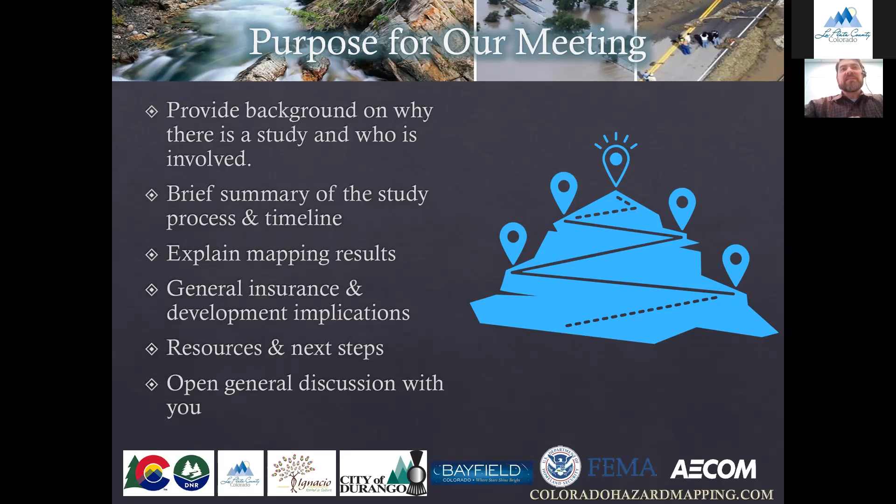If you have specific questions relating to your property, your structure, your home, your business, it's probably good to reach out directly to your floodplain administrator or the person that's acting in that role, because some of the questions get very specific and they're best answered on a one-on-one basis. So I'll just leave that as a caveat.

The National Flood Insurance Program is the program that administers flooding nationally. And flooding is the most costly and devastating occurrence nationally that we see. And so our government and many people associated with that have decided that in order to help recover, protect, mitigate from the risk that are associated with flooding, that there is a national program whereby these flood hazards can be depicted, and that community members can obtain flood insurance.

As part of the program, it is important to update flood hazard studies periodically, because it is most important that we strive to protect health, life, and safety. And so that is one of the reasons why this flood study was undertaken. The National Flood Insurance Program is something that communities participate in.

In order to participate in that national program, there are minimal level of requirements such as building requirements, insurance requirements, regulations that they must be kept, and other regulations that they adopt. Communities are required to inform the public of this risk and to also keep land use code requirements up to date as they change. And those are part of the things that communities have to participate in the National Flood Insurance Program. But the program is something that has other inputs too.

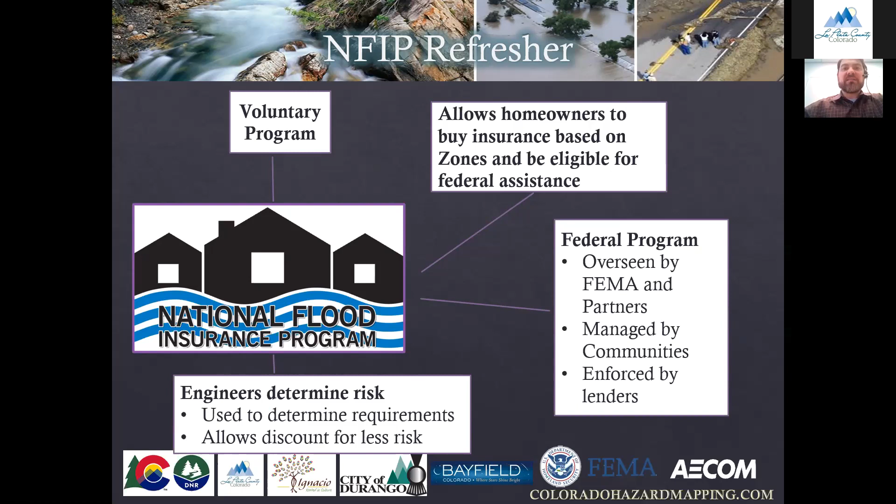There's a general partnership that goes into the flood study and making sure that all parties are at the table, so to speak. As I mentioned before, communities are the ones that administer the National Flood Insurance Program. They can communicate the risk to not only their constituents, but if they know that there are added risks that are not currently up to date, they can communicate that to the state, to FEMA, and see that those areas are updated. Communities are involved again in enforcement of regulations and public communication. And this public meeting that's being held is an integral aspect of the typical type of communication that happens around these studies.

The state, the Colorado Water Conservation Board, is a major partner. They respond to communities to incorporate any changes or risks that need to be updated. They can initiate risk updates if there are needs that they're aware of. And they play a vital role as an assistant to not only FEMA and communities in training and communication and any needs. FEMA, again, is the federal partner that provides a large amount of the funding and knowledge and resources to update these flood studies. And not only that, but also mitigation grants and a whole suite of other things, and some we'll get into.

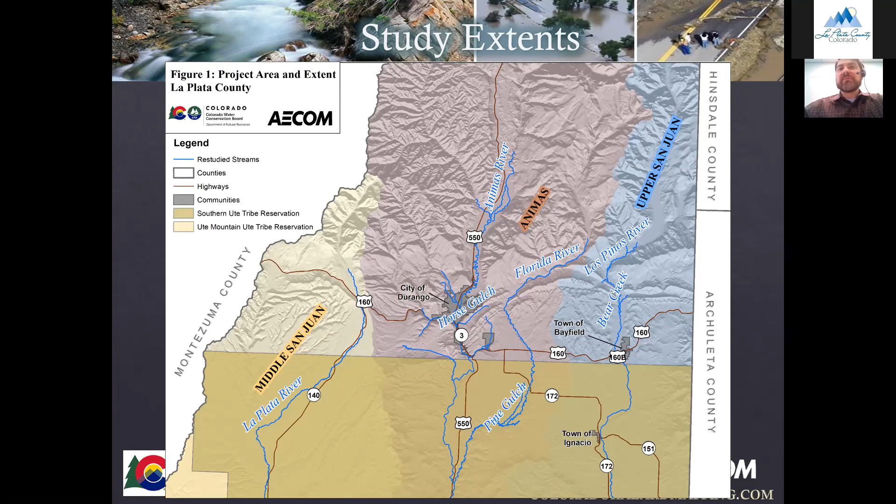We get questions on what goes into these studies. First and foremost, we need terrain data, which is a description of the land surface, the high points, the low points, and it's very detailed and very extensive. LIDAR, or very accurate laser mapping, is used to obtain terrain data on a large scale, and some of that was used in these studies.

Survey crews then are sent out into the field to capture more information, things that do not get picked up from the aerial topography, such things as bridges, the bridge openings, the sizes, culverts, also below water channel, or bathymetry, sometimes that's what that's called. Anything that's below water, surveyors go and pick that up, and it helps to describe the complete channel and floodplains for these streams.

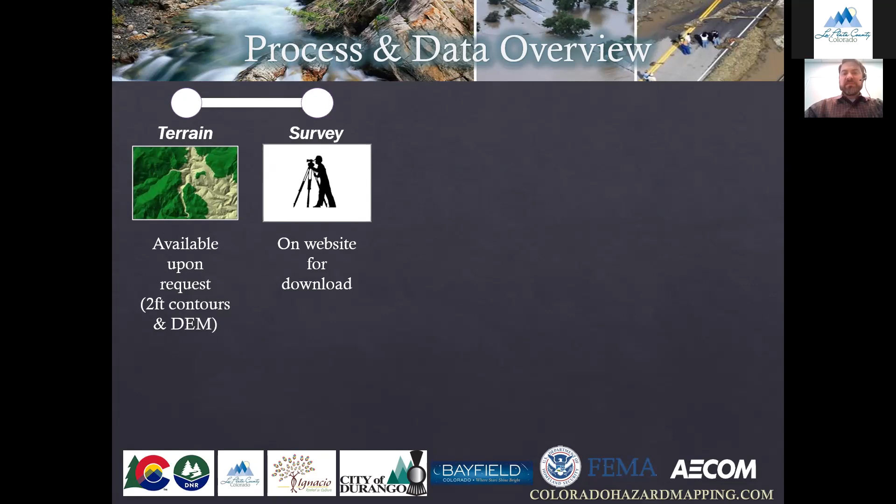Then statistical analysis on the amount of rainfall or peak stream runoff, which is called hydrology, is computed, and it determines the peak flow for rare storm events, for a couple of different events, and those are input and used. Again, all of this data, because it's federally funded and state funded, is available for download and inspection.

Then that information is taken and put into what's termed as hydraulic models. These models compute water surface elevation, depths, velocities, and determine where floods can go and how high they can get. Those are then mapped as floodplains for ease of use, so that anyone can quickly look and pan around and see on a map where those floodplains are depicted.

These data together generated some draft maps, or preliminary maps. That term's an important term. They are now preliminary, meaning they've been reviewed by multiple partners, including FEMA and their partners, but they're now in a preliminary state for the public to look at and see what the updates are. These have been provided to communities, all this data, including these maps. But going forward, there's a couple of steps that have to happen before this draft data becomes effective or final.

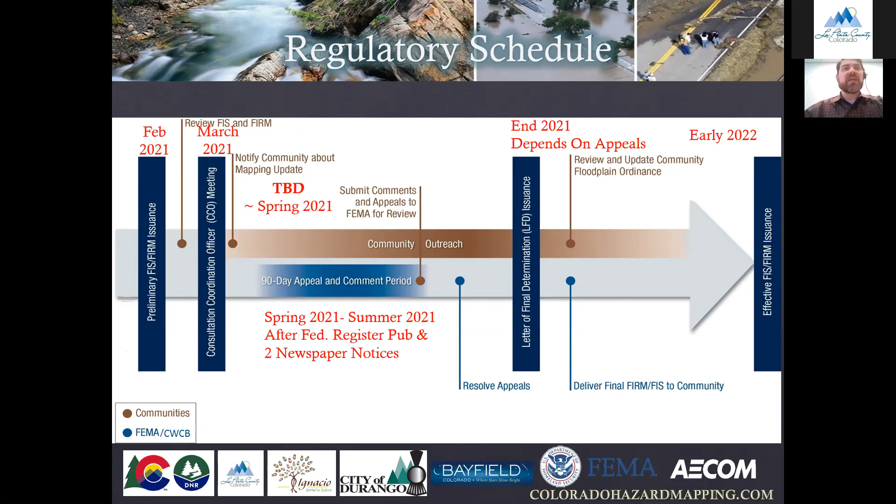Now, what are some of the results? We often get a question, what do these results mean? There's a polygon and a couple of different shadings on the maps. Is this where it will flood? And only where it will flood? Well, that's a good question.

They take into account the best available data at the time that they were given, at the time the topography was flown and at the time the survey was flown, including rainfall data, stream data, hydraulic data at the time that we had them. There are certain things that are not mapped because they are not a part of this standard flood hazard. Say, if a dam were to burst and break, that would be above and beyond the analysis that was performed here.

In major storm events, there are uncertainties with debris or clogging, or sometimes there are logs from the mountainous streams, or if there have been large burn scars or things like that, large storms can carry those down and they can clog up bridges and culverts and create uncertainty as to where the floodplains can go. Those are not accounted for because the amount of uncertainty is too great, but know that there is flood hazard and additional hazard that may not be depicted in these.

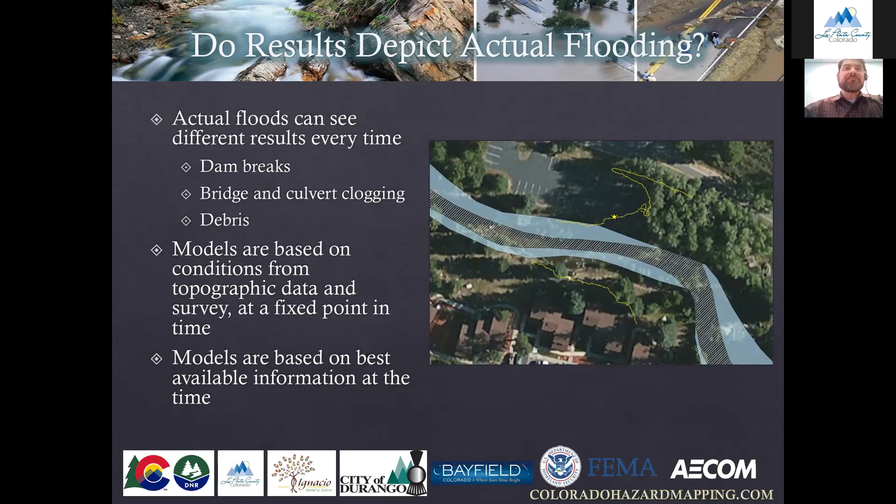What you'll typically see is a map with some different shading. Sometimes they have aerial photography underneath, sometimes they don't. Sometimes you can view them on online viewers where you can pan around and you can change what's shown beneath. But some of the things that you'll see, I'll highlight here.

The teal areas are Zone A, or sometimes Zone AE or AO or AH. That is the high hazard area, or the 1% annual chance flood. That's an important distinction because those areas are where flood insurance is required. In times past, you may have heard of the term 100-year flood.

And that is truly a misnomer, because sometimes people got it in their mind that, oh, we had the 100-year flood, I heard it in the news, so we're good for the next 99. Mother Nature doesn't work that way. She can flood when and where she wants. The term we use is a 1% annual chance, meaning there is a 1% chance that this storm could happen in any given year. It is a small percent, but it is a substantial percent.

The beige or orangish area is the 0.2% chance, even more rare. In the past, this was the flood that was called the 500-year flood. It is the area of moderate hazard risk. And outside of that, in the white or sometimes unshaded areas, that is the low hazard risk.

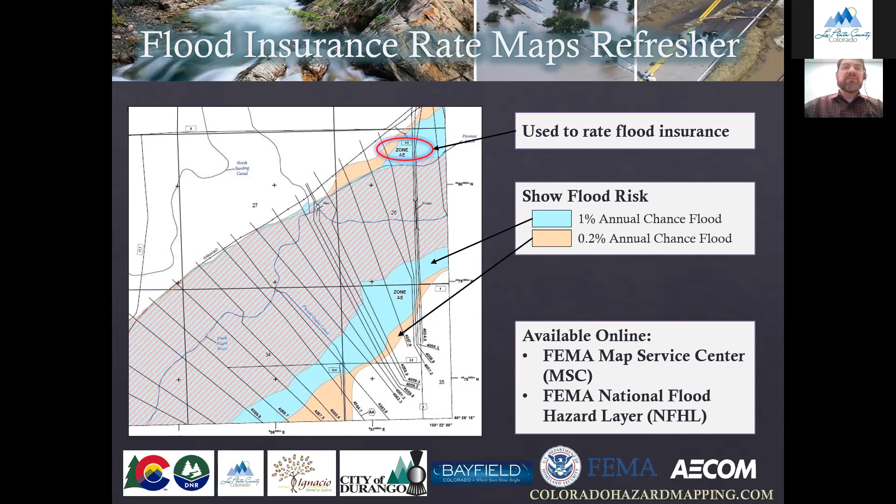These maps can be in PDF form, they can be in online form, they're available at many different locations. The current effective ones are available at FEMA, the Map Service Center, or their National Flood Hazard Layer. The preliminary ones are available at the community and also at a website, coloradohazardmapping.com, and I'll show that in a later slide.

In addition to the floodplains, in the center of the floodplain, there will sometimes be depicted what's called the floodway. The floodway is an area that usually depicts higher hazard, higher depth of flooding, higher velocities, but it's a special area. You've got the fringes on the outside, and on the inside is the floodway.

The floodway, as I like to describe it, is an area of regulatory importance. If in Colorado a developer was to build up and encroach on the floodplain on both sides, at what point could they encroach on both sides all along that river corridor to not increase the water surface elevation more than half a foot anywhere? That's the standard in Colorado. Some other states have higher or lower standards, but in Colorado, it's a half a foot. And then that is depicted as where the floodway is.

If any future development were to occur in or near the floodway, there is a higher regulatory standard to prove that there are no adverse impacts to your neighbor, either upstream or downstream. If you were to build or develop in that area, you would have to show that there would be no adverse impacts. So you'll sometimes hear it called don't impact your neighbor.

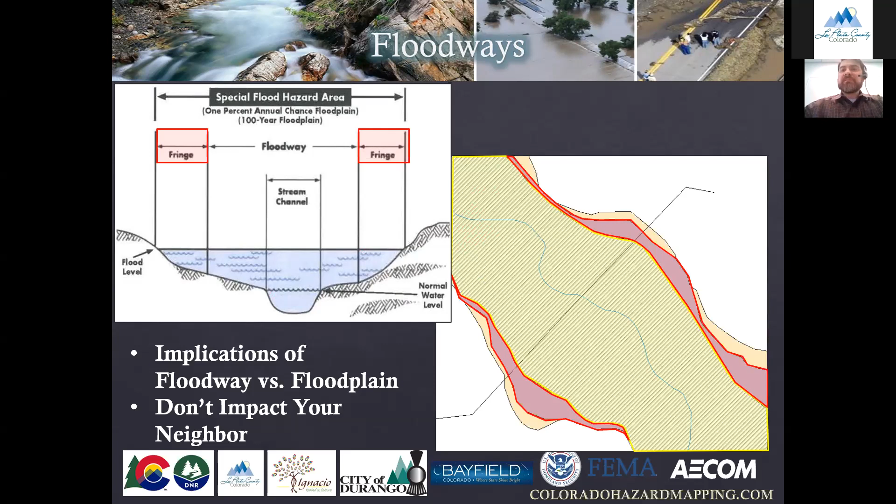So that's what a floodway is. Now, when we look at the updates to the current preliminary study versus what is effective right now, we took a national data set of structures, of buildings. It's not the most accurate, but it has quite a bit in there. Some counties or communities have more up-to-date building structures in their spatial sets, their GIS databases, their online databases.

But we did a quick count of areas that were currently in the effective special flood hazard area, or that 1% annual chance flooding, and those that are now newly in the preliminary, and those that would be removed from the preliminary and that are currently added. So you can see in the unincorporated areas, we have a total of about 940 that were in the effective special flood hazard area. Only 411 in the preliminary, which means about 705 were removed and about 177 were added.

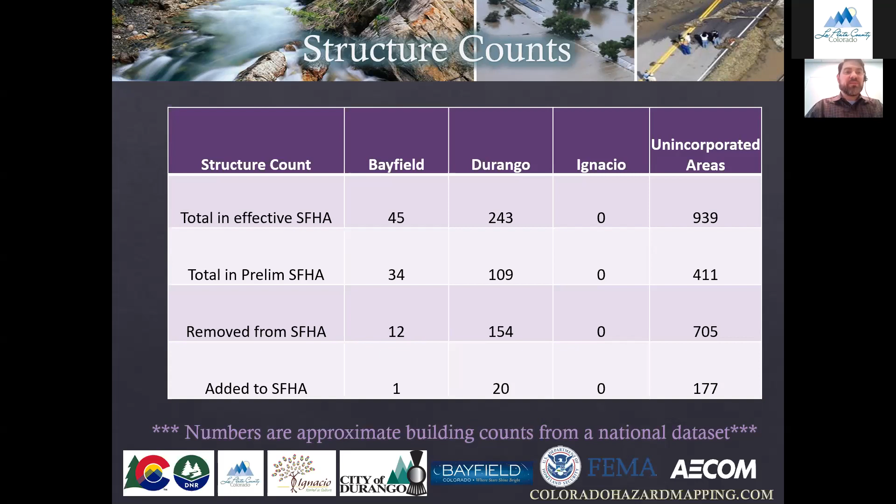And this is usually a result of just the newer hydrology and newer hydraulics, newer topography. There are lots of changes from some of these old studies. So there are people that may see their homes removed. There are people who may see homes or property or structures added to it. So these results, as they get depicted, they are a line on a map. And that's just for convenience sake to show where these floodplains are to the best of our data.

But Mother Nature does not operate as a line on a map. Areas can flood outside of a map. There can be debris areas. There can be a whole suite of uncertainty in the way that floods operate. So just because there is a line and a property is outside of that line, that doesn't mean that there is no risk. There might be less or reduced risk, low levels or moderate levels, and not the high levels, but know that a line on a map is just that, it's for convenience.

We did use our best data at the time, and it did go through multiple rounds of reviews and comments through contractors, so it has incorporated the best use of any current and up-to-date engineering data and judgment and methodology. But there is a process to allow for changes if there is any new information, new construction, any new type of information that would change the results. There is a process to do that.

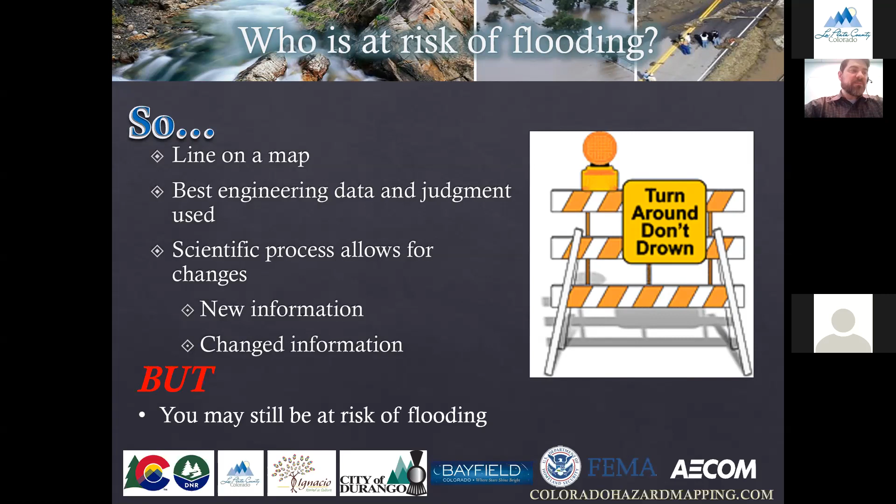But just know that we're always at some risk. It may be very small, it may be moderate, it may be minute, but there always is some risk of flooding. And that's important because flooding is not covered by our typical homeowners insurance.

And we'll turn the time over to FEMA. I don't know if it's you, Aaron, or Diana, who is going to take the next 3 slides. So I'm going to take the slides. This is Diana. Okay.

So I'm going to talk about 2 options that we have today. And the window of opportunity is closing very fast on us. Casey talked about the flood insurance rate maps. They've been called flood insurance rate maps in the 50 some odd years since the program was initiated, but that's changing. Right now, you have until September 1st to take advantage of our, as Casey mentioned, discounted premiums. But after October 1st, we are doing a new risk rating methodology.

In the past, we've only taken into consideration 2 types of flooding, riverine and coastal. But we know across this country that we have different types of flooding. We have heavy rains, we have tsunami risk, we have other types of causes of flooding. A Mack truck hits a fire hydrant, or we have these cloud bursts that come down and drop a whole bunch of water, regardless of the flood zone. Where that water lands and rises is going to cause flooding to some people.

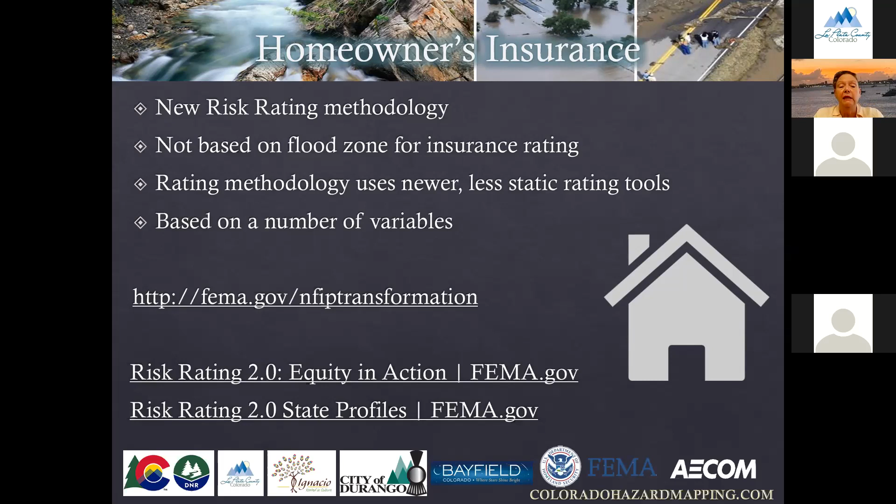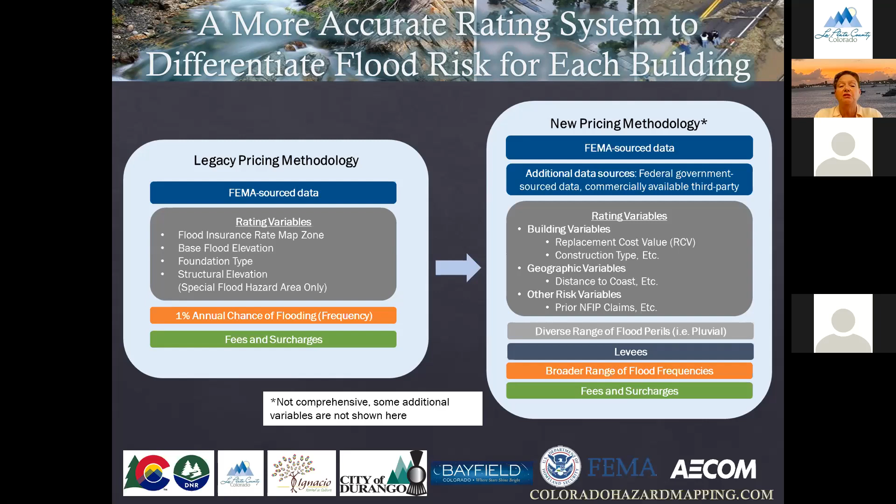So these are some of the variables that we're going to be using. On the left-hand side as we look at the screen, those are what we've used in the past: the map zone, the base flood elevation, what was the difference between the lowest floor and that base flood elevation, the foundation type. And as you see on the right-hand side, the rating variables, then we've got the different types of flood perils, the pluvial, which is heavy rain, the fluvial, which is riverine, the coastal areas. How are levees affected? What are the flood frequencies? We have multiple 100-year floods in areas every year. And then we add our fees and our surcharges on top of that. Next slide.

So with map changes coming in, we have to look at, okay, what's the rating methodology best right now? The risk is there today. The maps have identified that risk, and you need to look at that risk and how it affects the property owners that are within those special flood hazard areas and outside of those special flood hazard areas.

As I said, prior to policies being written September 1st, because we have a 30-day waiting period, people can take advantage right now and get a preferred risk policy to cover that risk when they're outside of that high risk area, or if they're built to a higher standard, and that will carry into affecting rates under our risk rating methodology that's coming later this year. At no time will we increase premiums annually more than 18% on an individual structure.

For certain types of buildings, Congress has said, well, we want you to increase rates 25%. So those are severe repetitive loss, non-primary residences, commercial residences, structures that have been flooded and are substantially damaged or want to be substantially improved. Those carry actually a higher risk for flooding than anybody else.

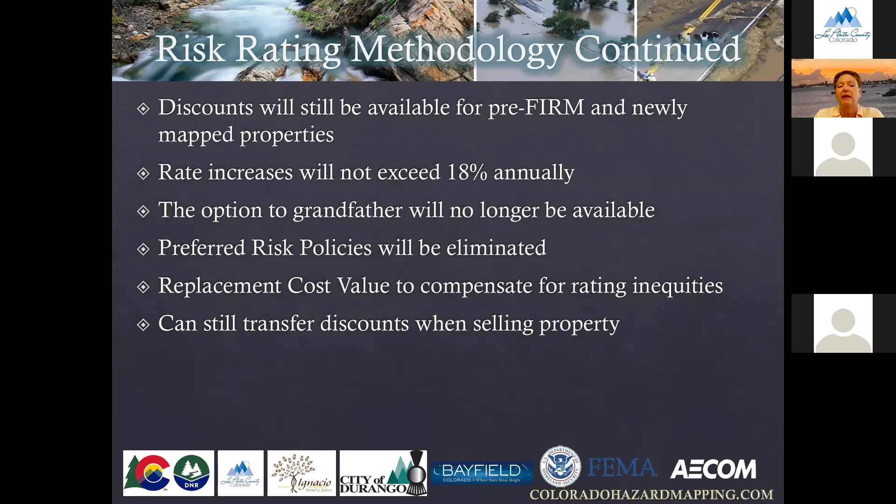Oh, I think that was the last one. It is. So I don't know who's doing the development implications. I'll just touch that just briefly. Okay. But thank you very much, Diana.

If there are any questions about insurance, we can put them in the chat, and some of our specialists can point you to resources or set up a time to answer some of your questions one-on-one, because insurance is a specific and an individual thing. Everybody's case is a little bit different, so some of those questions are best handled on a one-on-one basis.

As Diana said, in addition to those who already have homes in a floodplain or could be in a floodplain or out, there are now potential implications for communities and development. The community ordinance determines what type of regulations are required. They follow the guidelines, of course, of the National Flood Insurance Program. But with these preliminary maps, they can adopt these as best available and regulate to the more restrictive preliminary ones versus the effective, or they can just regulate to the effective ones until these preliminary ones become effective.

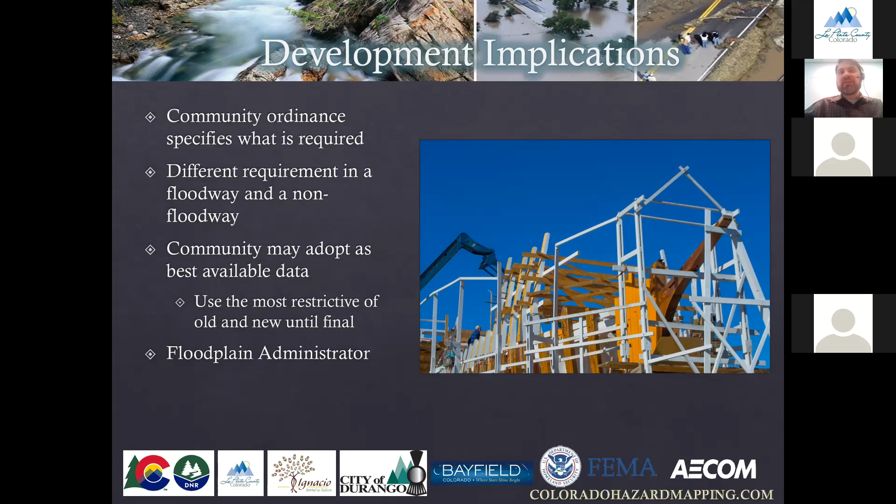Note that there are additional implications for development in a floodway versus in a non-floodway out in the fringe. If there are any questions about development, your floodplain administrator is a resource to reach out to for any specific questions. We often get asked, can these results be changed?

As I alluded to, yes, during this appeal period there is a window for any new information, and it must meet a stringent standard. I'll read this: based on mathematical or measurement errors, natural change, physical conditions, or technically incorrect data or methodology. That would need to be submitted to show that an area, a stream, or a portion is incorrect. They must be supported with technical data and submitted within that 90-day appeal period.

Appeals, because that's the specific term, are limited to areas with new or modified special flood hazard areas, the 1% annual chance. That's the teal areas and the floodway on the inside. Requested changes not within that, say a label, a road, a political jurisdiction boundary, are what we call comments. They can be incorporated too, but they are not a formal appeal. They must be submitted through the community, which combines them and submits to the FEMA office, and FEMA will review them and incorporate as appropriate.

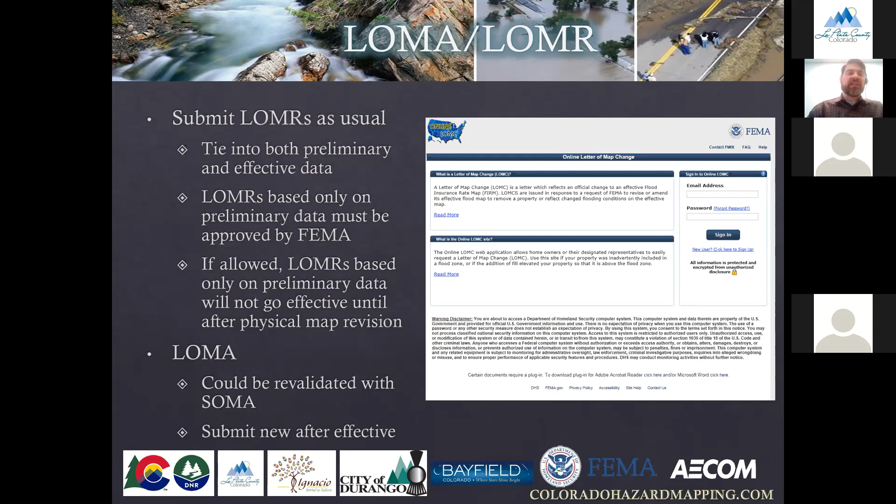If there are any current properties that have a LOMA, they will be revalidated closer to when these become effective, to show that these letters of map amendment still show the structure as being out with the new effective data. But you want to make sure that once these floodplains become effective, your lenders or insurance agents are aware that these are still effective.

There are a bunch of other resources available to everyone. There are some contacts on the last slide, but reach out to your local floodplain administrator. They're a great resource, and floodplain administrators can also reach out to the state and to FEMA. There are the state study leads, FEMA and the state, and our FEMA area representatives, Diana and Aaron, both on the phone, who are good resources to have.

I recommend going to floodsmart.gov if you just want to learn about it. There are some great videos, and they're adding a lot of informative things. It's constantly being updated, especially with this new transition. There's also an 800 number that Diana mentioned that anybody can call. The state has a website, CWCB.

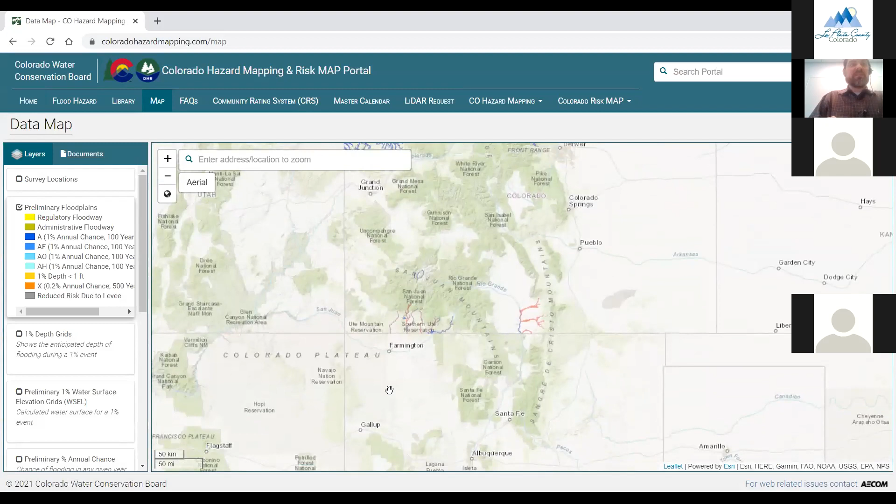I'll just take a quick moment to highlight the website coloradohazardmapping.com. This is available for anybody to take a look. There are a couple of different areas. You can click on the map if you just want to browse around and see areas where preliminary data has been incorporated. If you're familiar with Google Maps or other community maps, it's very similar. You can pan around and take a look.

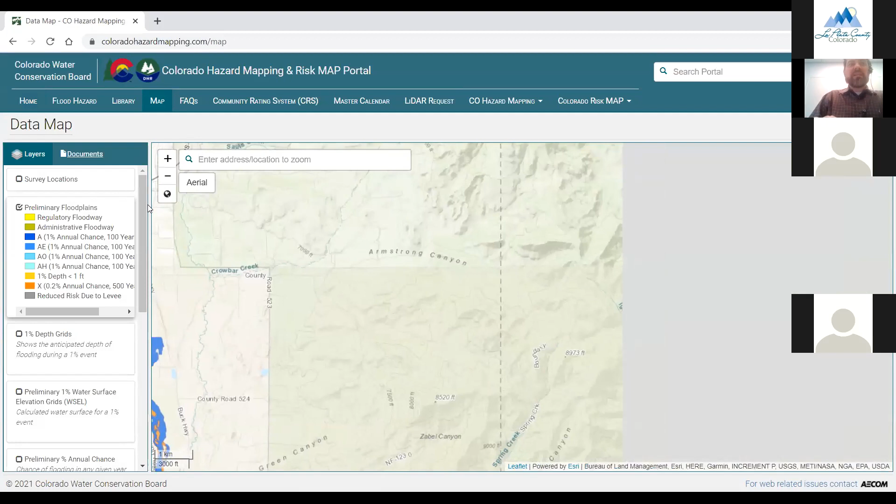So we could take a look near Bayfield. Right now, I've got the preliminary floodplains. In yellow is the regulatory floodway. The blue is the zone AE, or the 1% annual chance, also the 100-year. And in orange is the shaded zone X, or 0.2% annual chance, or 500-year floodplain. You can pan around and change the background if you want to see your community.

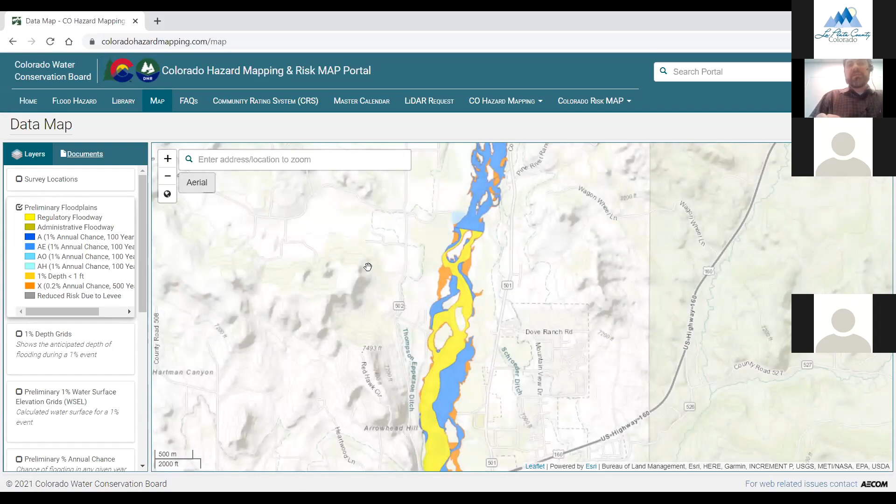If you go to flood hazard, you can type in a specific address, and it'll pull up your address and compare. There'll be a slider that compares what's effective on the left-hand side and what's preliminary on the right-hand side, and shows some information about that property.

You can also check out your community. Oops, I think I hit collect. Let me go back here and go to La Plata County. There's additional information. It's set up as a story map, so you can read through how this study progressed. As you scroll down or click on these, you can see the different milestones that happened.

See, actually, there's a project going on now, but the previous project, you can see some of the milestones that took place. You can click here and see some of the different meetings. There's usually slides or PDFs or documentation associated with that. You can click and see where survey was taken, where those flow rates were computed, the hydrology and hydraulics, or again, you can click around on the floodplain.

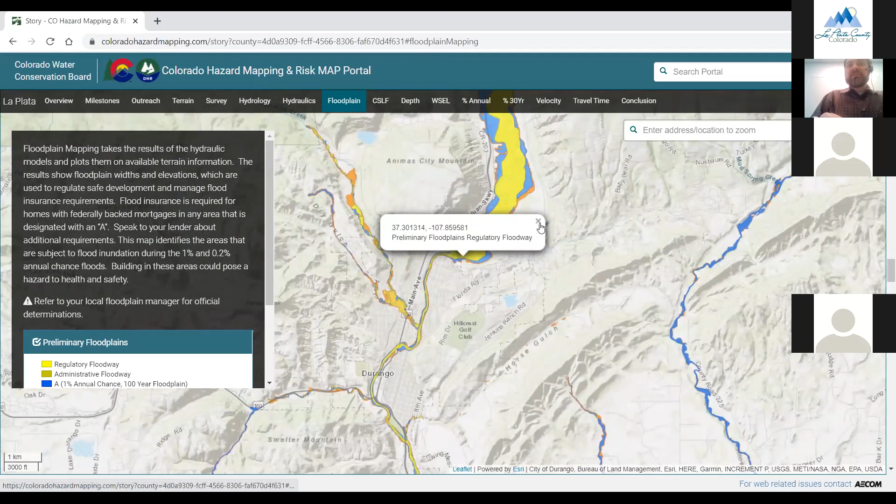I'll zoom in on an area to show something. Oops, excuse me for clicking multiple. So over here, I can turn on the preliminary and see what the preliminary floodplains are. And I can also turn on FEMA's national flood hazard layer, or what's called the effective. And sometimes you can turn both on.

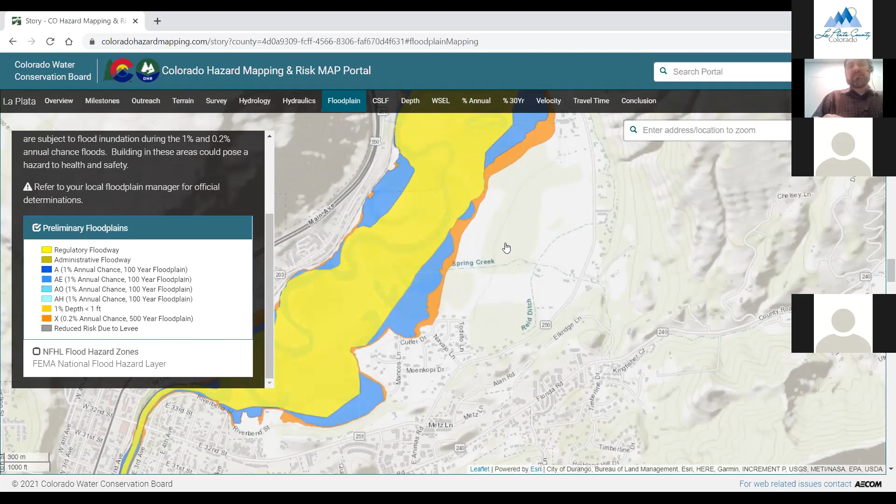It gets a little busy, but you can see in areas where the light blue is out here, is now back a bit more. So there's areas that are reduced. So this is where it is currently, and this is where the preliminary shows. So there's definitely some reductions and some changes. So I suggest going around and looking there.

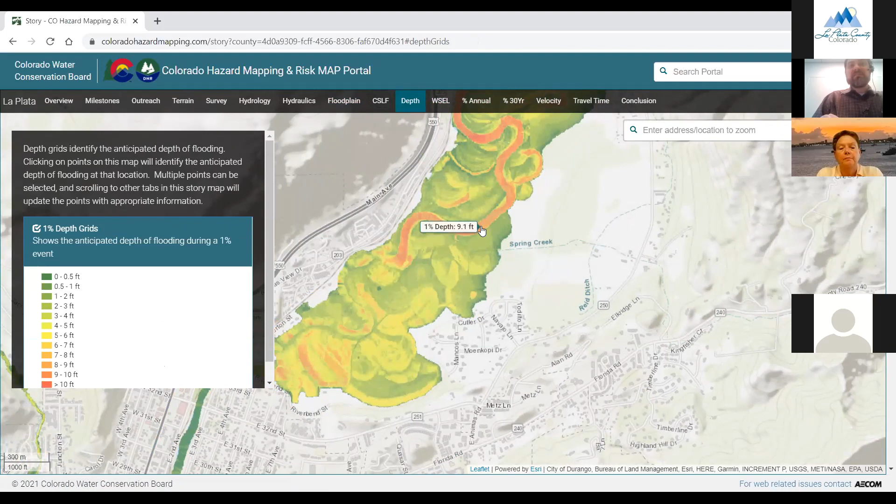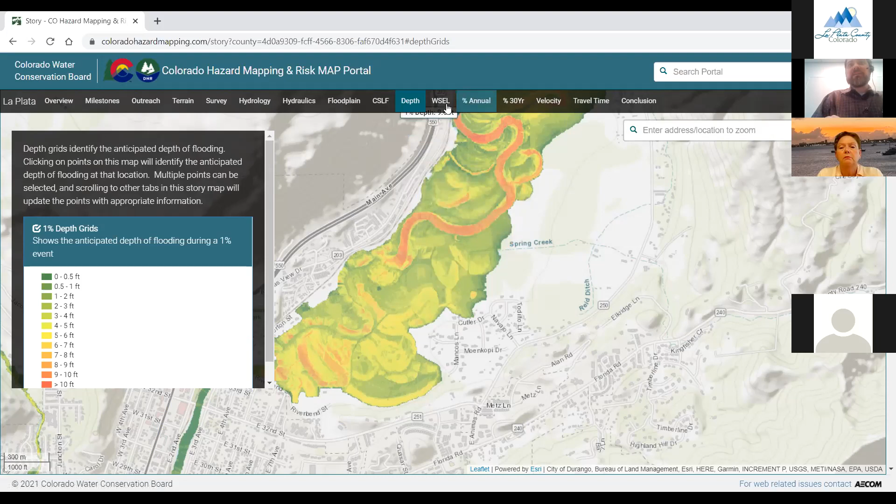Some also interesting things that you can take a look at are the depth grids. You can hover over a location and see what the depth of flooding in the 1% annual chance could be. You can see in the stream it's deeper. And so, if it's important to know how deep the flooding could be, that's there.

I'll also suggest looking at the water surface elevation grid. You can pan around and this shows the 1% water surface elevation grid. You can click at a point and it'll tell you the water surface elevation. That's also called the base flood elevation, or BFE. That's important to know for your property or nearby, or if you're going to build or do improvements, that's an important number to know. And there's some other ones.

Yes. Can I add one thing? One hazard that we don't map, and that is flooding from a burn scar. Usually that flooding is, there's rain on the upper elevations of the hills and mountains, and even a 1/4 inch of rain on that burn scar. And you've got two very big burn scars. You have the Missionary Ridge from way back when, and then you've also got from the 416 fire a couple of years ago.

There are very huge burn scars that are still not revegetated, that can cause not floods, but can cause mud flows as the water comes down and picks up debris and soil that it can't absorb, that can also increase the risk for flooding that we don't map. So keep that in mind. If you can look up the hill and you see the burn scar, you need to be thinking about protecting yourself from those mud flows.

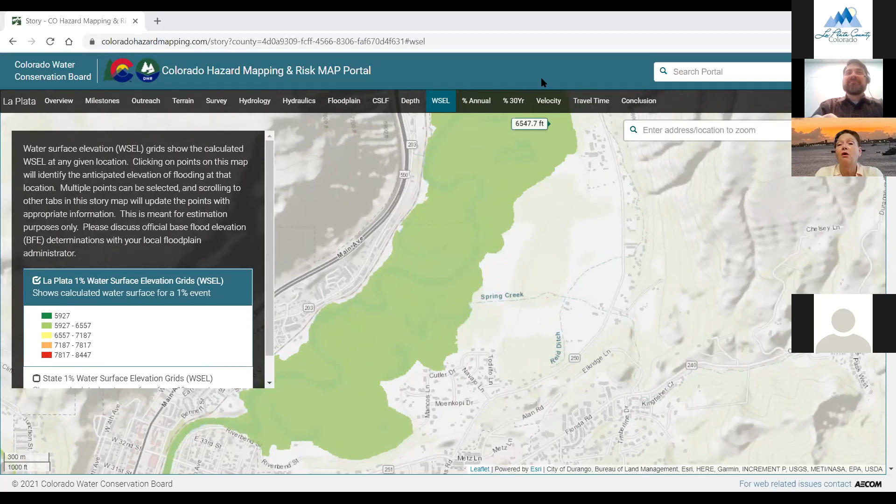Yeah, and one other thing, when that muck comes down the hill, it goes to its lowest point, and usually you've got a stream along that lowest point where that debris can get in there and could increase the height of that floodwaters that, again, we don't typically include in our analysis. Yeah, definitely. And living with wildfires, every year there's more and more. So it's something we have to live with and be prepared for.

I showed you the website. Here's just in the slide where it is, coloradohazardmapping.com. Excuse me.

And in conclusion, these floodplains and flood hazards, they depict risk that is already out there. They're not new risk. Some people get in their notion that, oh, well, we had a flood, so we have to depict new data. Are they based on a specific flood? And no, they're not based off of one specific flood. They're based off of the most up-to-date data and statistics and rainfall and stream flow. But it is mapping risk that is already there.

These data will be used for new maps once they become effective. They are preliminary right now, but there is a time frame for communities and constituents and the public to review, to incorporate any changes if there need to be, and to prepare for when they will become effective.

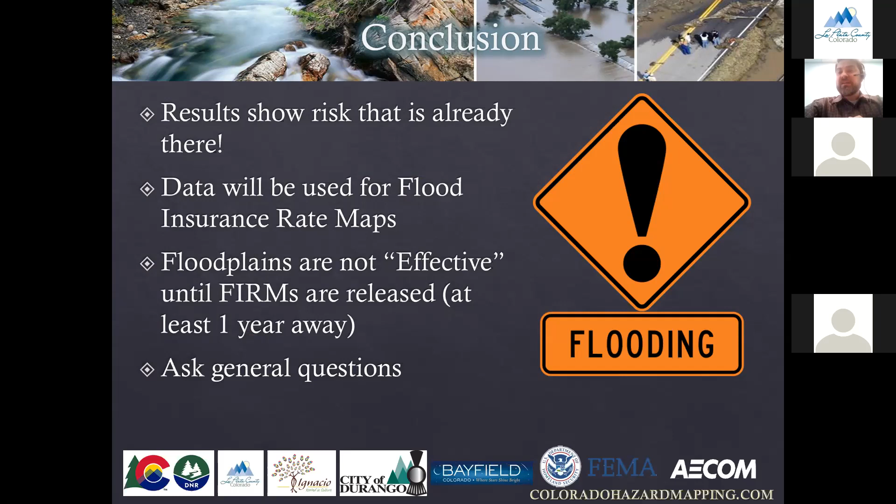Excuse me. So with that, I'll open it up, if there are any specific general questions, we can go to that. And I'll leave this slide here. I believe this is the last slide. The contacts if you need to find your specific community floodplain administrator. But that's the end of my part. If there are any comments or questions, let's see if they need to be addressed.

So Casey, there is a question in the chat room about the revalidation process and how it works and how property owners will be advised if that is revalidated. Sure. I can take that, or if anybody else wants to jump in. If you already have a letter of map amendment on your property, there's a process towards the end after the appeals come in to make sure that there won't be any more changes. FEMA and their contractors will go through and make sure in each individual case that they are revalidated, and they perform what's called a revalidation.

You shouldn't have to do anything specific. Just be aware that you had one, and if a lender or insurance agent comes to you and thinks that you might need to pay insurance, but you have been revalidated, those letters get sent to the communities, and they will be able to notify. Was there anything that you wanted to add, Marta? I think this is Terry. What I'll add is that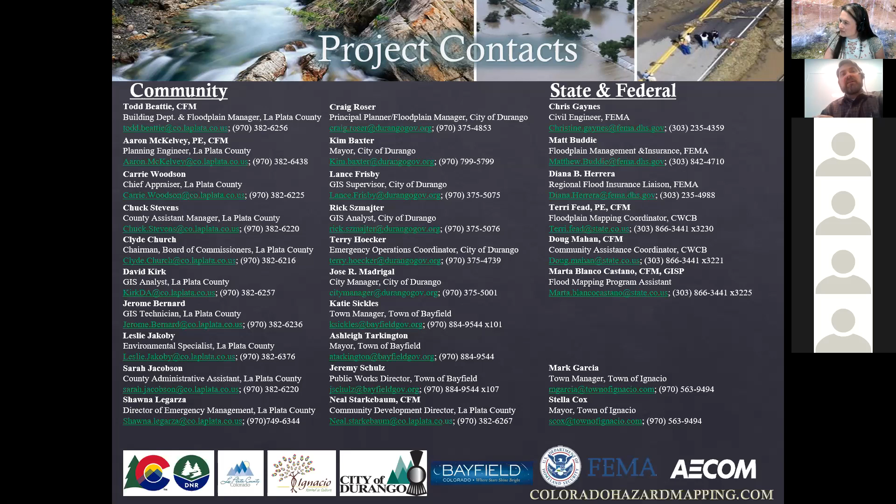A new study is commencing for this area that will incorporate new LiDAR, and it'll probably pick up some of the streams and areas that were not studied as part of this, and in some of the neighboring counties and communities. That study will use the most up-to-date LiDAR at the time. So if there are any specific areas where the preliminary data that's out now is out of date based off of even newer LiDAR, and it's a priority for you, let us know, because there is additional funding for a further study that will be commencing shortly.

Yeah, we're talking about data that's less than a month old. Which LiDAR data set is it? Is it specific for a community? This would be flown by the community. This would be Durango and vicinity. Some of the peripheral areas, we don't stretch as far as the Florida, but it would incorporate most of the Animas River through Durango, Junction Creek, Lightner Creek, some of those areas. Right. So it is brand new. It also would incorporate areas where we've had some flood mitigation in new development areas, where we have flood ponds, things like that. So we want to incorporate some of that, some of our storm basins, which might change some of the 2019 data.